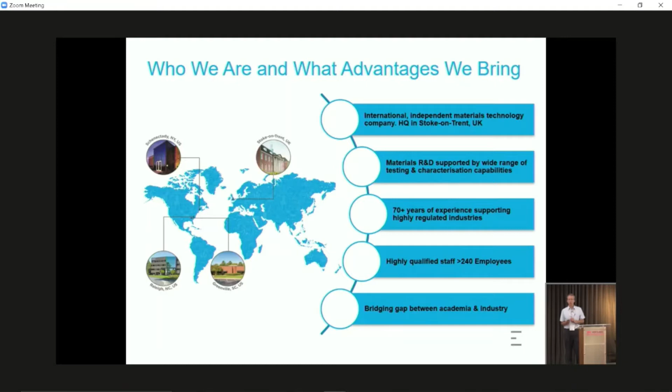So what we actually bring, where do we sit? We're actually sitting in a sort of triangle between research and development, materials consulting, and specialised testing. And the more of those things that can interact, the better as far as we're concerned.

On the research and development side, we're looking particularly, myself, at advanced ceramics - that's one of my areas of expertise. We're working in accelerated materials discovery, so this is new materials for new applications, and we've got some platform technologies around that.

Beyond that, into wider materials, we're looking at materials optioneering. We're looking at process support, particularly around additive manufacturing. We're looking at failures of systems and understanding those, very much around harsh environments and how materials are used in those.

There's certainly a big change in materials needs for aerospace at the moment, both with fuel issues - so carbon reduction, making the aerospace industry more fuel efficient. How can things be operated at lighter weight, higher temperatures, how things can go faster. All of these put challenges onto the materials that are fundamentally in there.

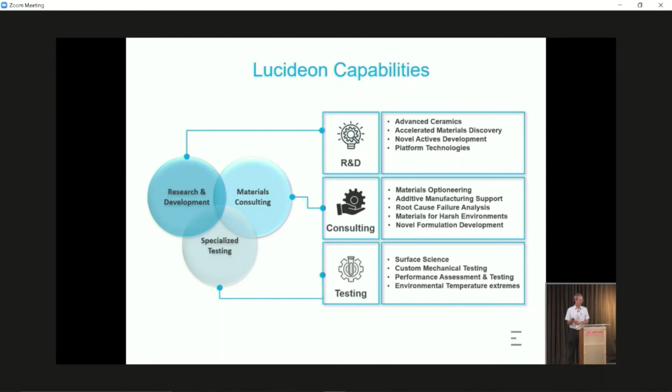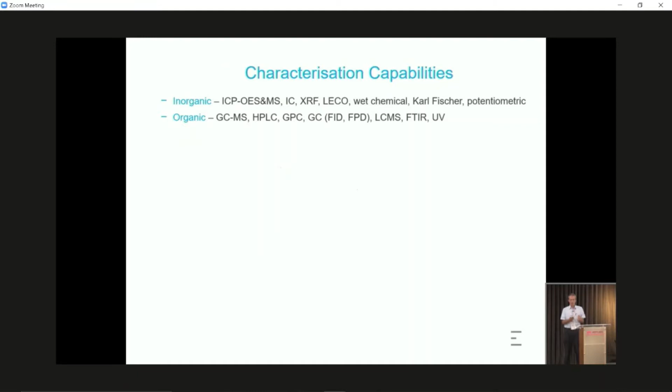So what we've got characterization-wise, we do a lot of taking things right back to the beginning. We're actually looking at the chemical composition - what are the building blocks in those materials? Can we measure it, what's there, is it compliant, what's the variation, etc. So lots of capability from ceramics, metals, and polymers within there.

You've then got to combine those - how do you put those different chemical entities together? So we're looking at the microstructure, what crystallographic, what physical structures are we making, how are those then actually pulled together, how are those made into structures? We'll be looking at microstructures, what's the grain size, what's the porosity, how do those bond together. Looking at fractography, looking at failures, how have they failed, and what's gone wrong, what can we learn from those.

On the surface side, we're looking at, as I said, very near surface, so the outermost layers of atoms and molecules. So if we think we've actually gone and cleaned something, we certainly haven't cleaned it - there is always residues on those. Understanding what those are and where they're from can be really quite important and enlightening. Similarly, also topography - a lot of things are actually topographic, even though they may appear to be contamination or discoloration.

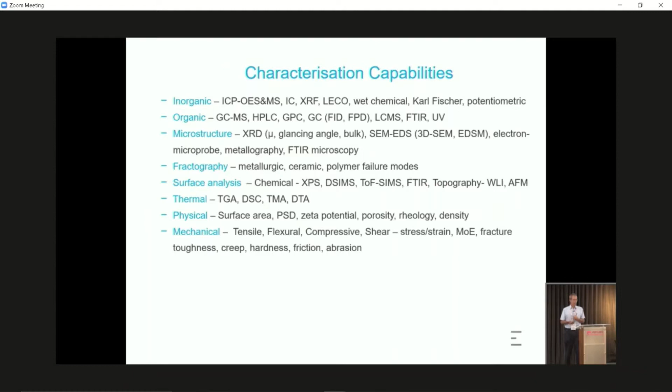Then going into some of the other things, a lot of capability around mechanical testing, so flexural, stress strain, etc., but also looking at the actual feedstock materials into those - what do they actually look like, do they have the right properties, performance. So quite a wide range of capabilities.

And then going on to environmental exposure, how can we challenge those materials into environments that we're actually going to be seeing? What can we do temperature-wise, what can we do age-wise, and what can we do thermal exposure-wise? And then obviously corrosion is an area, and one particularly unique capability is stress corrosion cracking, where we're actually looking at long-term crack growth within systems.

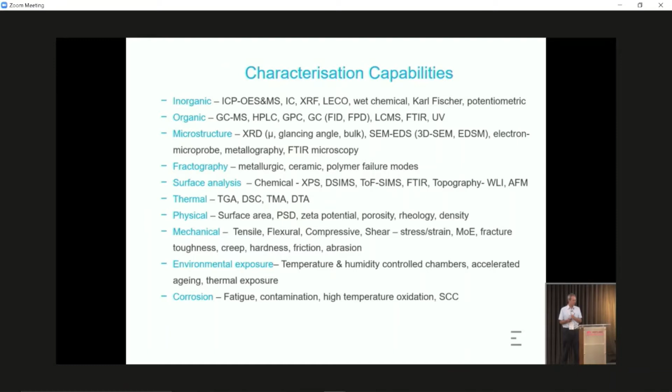So when we actually come back to testing programs, there's a lot of unpicking that's quite often needed. Fundamentally, to me, it always comes back to what the aim of what we're trying to achieve is - whether it's evaluating a material or evaluating a component.

So it's kind of the why. What conditions are we looking at? Are we looking at doing it just on the bench at ambient, or are we actually looking at trying to replicate some sort of environmental conditions that it might be expected to see?

Are there defined test criteria? What's actually needed within those requirements? Sometimes that's very clearly defined, other times it's much harder to do so. What are the materials themselves? Again, this has a big impact on how we'd actually go about evaluating it.

Big move in composites - where you'd have had traditional polymeric-based composites, now you've got ceramic matrix composites. How you test and evaluate those is very, very different. And sometimes you'll be working standard methodologies with the changes within materials, conditions, requirements, and particularly if we're stretching where those environments might be, there might not be appropriate standard test methods.

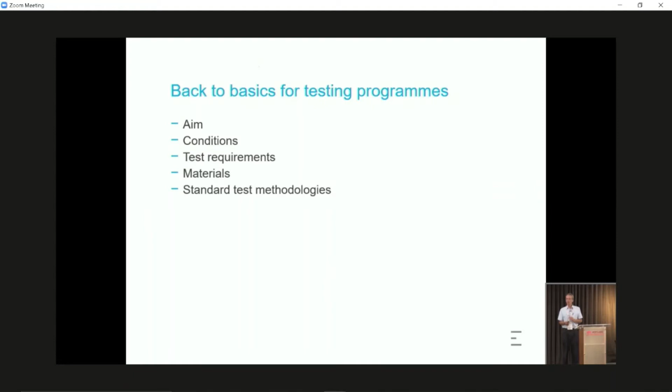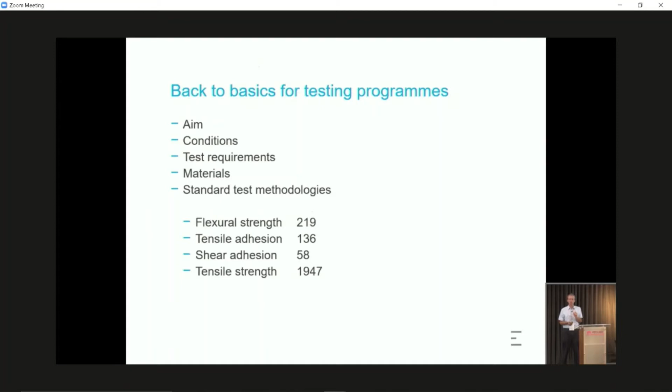So if we pull out that flexural strength measurement, again, some of those are within, and then we narrow it down to some of the material types that we might be interested in. I've just looked purely at some of the non-metallics, and very quickly those numbers collapse down into far fewer test methods. But again, are they appropriate for what we're trying to do?

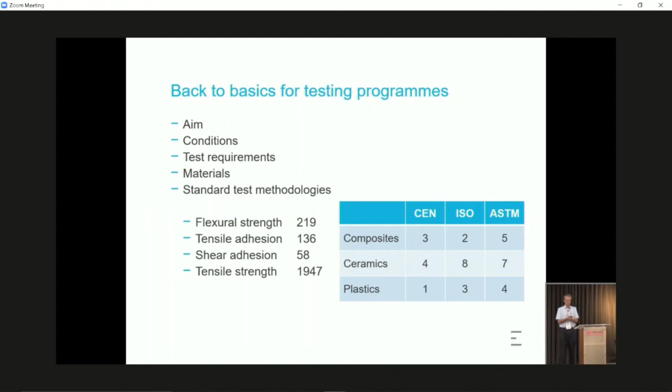So within the test programs, there's always a lot of complexity, and certainly with materials, we're looking at making things lighter, making things operate at higher temperatures. What other material options are out there? How can we push that boundary forward? And within that, there's never going to be a straightforward way of testing it.

So there's a lot of complexity - what material, how are we going to do it. Timeframes - we might have considerable constraints around timeframes of what we've got to do, and sparsity of material. If we're in a material development stage, we've almost certainly got much less material to work with than we would like to.

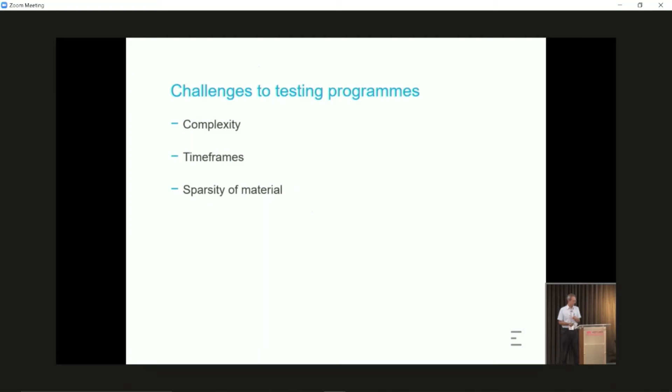Test parameters don't always work with the material that we're looking at. So yes, we might have a target of what we're trying to do, but actually, because of some constraint, we might not actually be able to get there. Test methods may be there, they may not - we might have to modify those in some ways. And clearly within that, there'll be a lot of conflicting priorities.

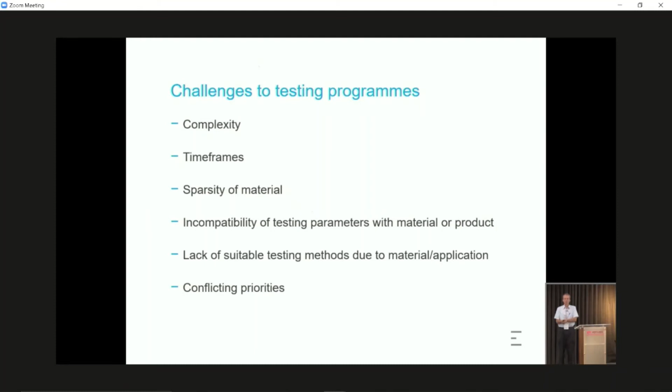So depending on how much material, you might have to do things sequentially. However, if timeframes are more important, then things like that fall by the wayside. So really, it's how do we map that out? Back to the purpose - what are the must-haves? What have we really got to get from what we're trying to do? We might have some peripheral nice-to-haves around that, but key within that is that sort of drop-dead, we must have this. Understanding what's available material-wise, and what we've got to do to prepare and make those materials into specimens.

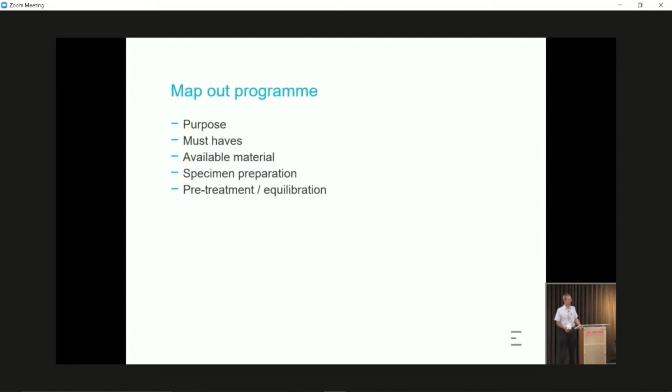How we're going to pre-treat, how we're going to equilibrate that. And then we've got a sequence of testing - we may be able to do some observational things first. We might have to pick the right test protocols, test methods. We might have to develop methods specifically for that particular application, and how many tests are actually valid for what we're trying to do.

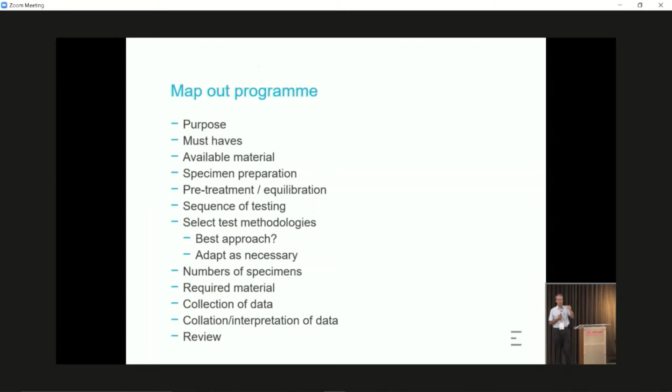We could then go through, we get the required material, we collect the data, we collate that and pull that together, and all the way through we have to review it. So really we're trying to put together that program and then really unpick that - have we covered all those bases within there that we need to? So finally, let's agree and finalize that work plan, so all perfect, everything going forward.

Okay, so now we actually start doing it. And this is where things invariably never quite go according to plan. So initially, have we got all the documentation in place? Have we got those pieces of paper? Do we have traceability of material? We undertook a piece of work a couple of years back, and the tracking of those actual parts before they got to us - there were problems with that, which to a large extent then invalidates a lot of the work that you've done. So it's really trying to make sure everything's done to make certain that we're going in the right place.

We got the material. Is it actually as we thought it was going to be, or is there something fundamentally different? Is it thicker? Is it thinner? Does it have holes in? There's quite often something that you never quite saw or anticipated within that. So always having a little look and see.

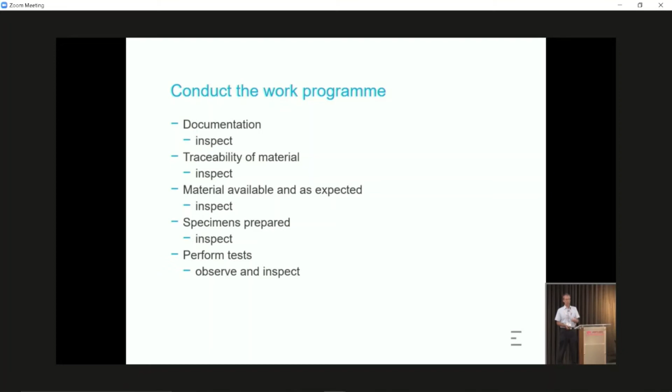Prepared the specimens again. Are they fit for purpose? Can we progress within that? We go through, we collect all the data that we need to, all the way through, keeping an eye on what do we see, what do we look at, what do we interpret from that, and similarly when we get data.

So, there's always something happens that shouldn't, or something unexpected that happens. First question is, what are we going to do about it? Does it compromise what we've seen? Does it compromise the data or the methodology? Does it invalidate what we're actually conducting? Or have we seen something that we didn't anticipate or expect? So essentially that's where we would get to.

There's really three scenarios around that. We either carry on, we go over the trenches and just battle on going forward. We react and learn and probe around that. What's that telling us about what we're looking at? What else can we find from that? Or actually, do we have to stop,

stand back and regroup and replan. And quite often, particularly with materials that are novel or in applications that are, we do come across those sorts of scenarios. And then whatever we do, we've got to agree how we're going forward with ultimately whoever's paying the bill at the end of the day. And clearly keeping that onward flow is absolutely key.

So I'm going to pull through a number of different examples of things. Some of them are around in ceramics, some of them are not. Clearly, as I say, my expertise is within the ceramic area.

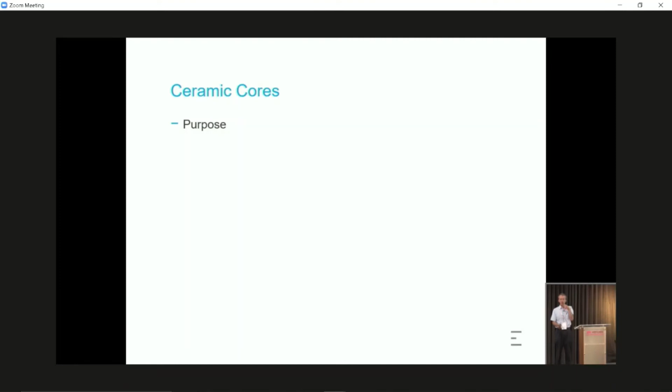One of the things that we actually work with is ceramic cores. Ceramic cores are a sacrificial ceramic part that gets cast within a turbine blade. If you make a turbine blade, what you would generally do is have cooling channels within these. So you would actually cast a ceramic component that goes in that is sacrificial. The key thing for that is its shape. So it's got to have a uniform shape, and it's got to expand uniformly.

So it's got to expand. You can't have it stretch in one direction or twisting or warping. And it's got to be readily removed at the end of the day. So they're the sorts of things that you're trying to do with it. It's how do we actually accomplish some of those.

So we'll pick one of those out: thermal expansion, how much it grows and shrinks. Now, we could make a bespoke test specimen with all the parts, but it's actually a different shape, formed differently. Is it actually a true representation of what's being made? Maybe there's time constraints, but that part has been specially designed with mineralogy that controls some of that thermal expansion. So rather than measuring that directly, we might want to step back and measure an analogy of it, trying to keep that going through.

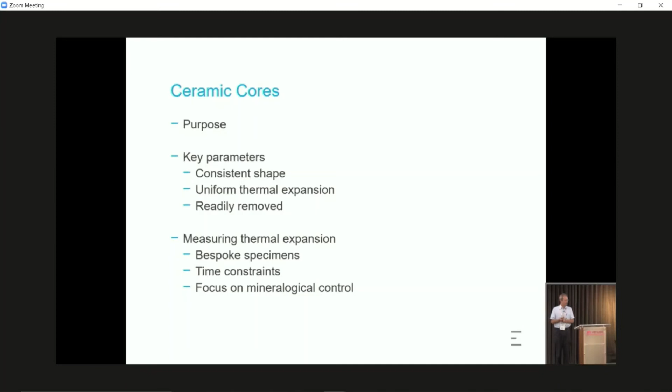This is a ceramic matrix composite development that we've been working on. This is quite a thin walled structure, in this case probably about 2 millimeters thick, and capable of high temperatures, in the sort of 800 to 1200 degrees range. So not massively high, but not massively low.

What we were looking at here is some indicative data. We haven't got much parts, so what data do we actually collect? Clearly the structure of the component is very important. We want to understand how those fibers are put together, how they're meshed together, how they're bonded. So we've got to collect that sort of data.

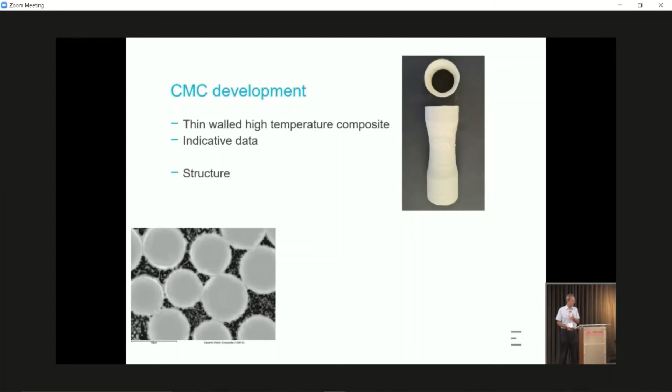We want to look at the thermal performance of it. What happens when you heat this up? What you can see there is a whole sequence of different trials of modifications to the actual material itself, and you can see how we've changed a couple of the parameters. We can dramatically change its dimensional stability, its shrinkage, etc. So clearly within that, we've got sweet spots that we're actually working towards. These are the sort of steps that we're getting through to try and get to where we want.

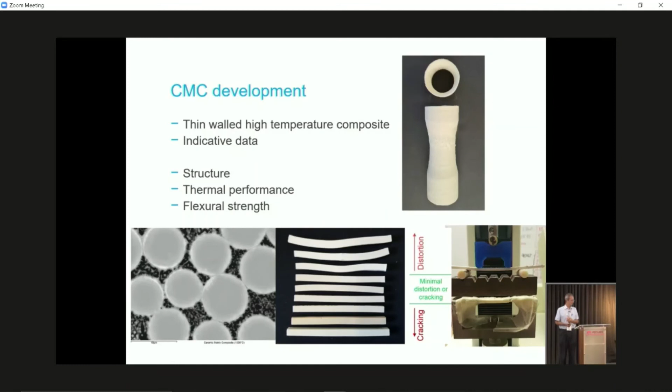And then we need to measure some mechanical properties. So in this case, we're doing some flexural strength measurements, and again here we're looking at deformation, deflection of it. How far that will go is quite key.

So another piece of work where we're actually looking at some interfaces in a very novel application. What we're trying to do is look at a whole sequence of different options, and we want to make them fail fast. We want to get rid of things that are of no use to us with minimal effort.

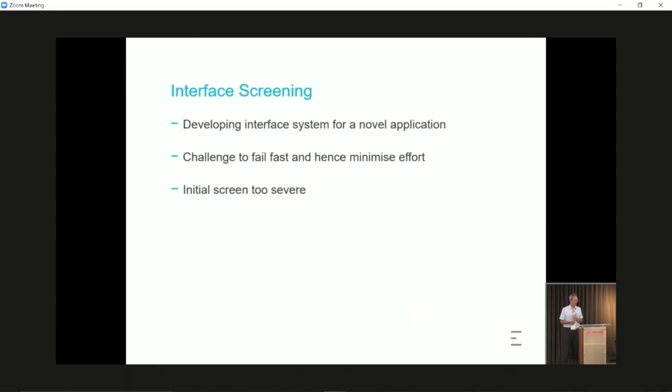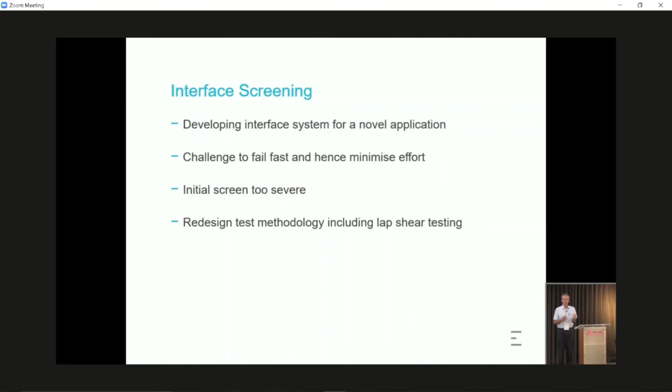So we challenge it as severely as we possibly can early on. Unfortunately, in this case, we went too far and everything actually failed. So we've got to roll back from that, we've got to replan, in that our scenario was somewhat extreme. So we redesign the test methodologies. Because we're looking at interfaces, we redesigned the way we're doing some of these lap shear type measurements, to try and get much better data than we would have done otherwise.

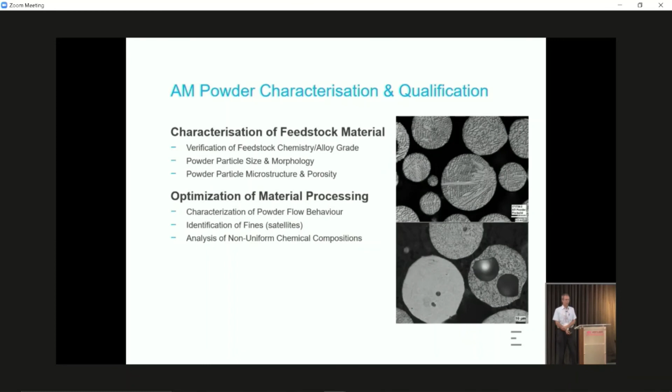Another area that we do a lot of, particularly my colleagues who are US based, is around AM processes and material characterization. In essence, a lot of things come back down to the feedstock materials, understanding what they are, and seeing what we come across within those. So we're looking at the feedstock materials and those processes, and at each stage evaluating, unpicking it, seeing what's in there to learn, and then recycling the material.

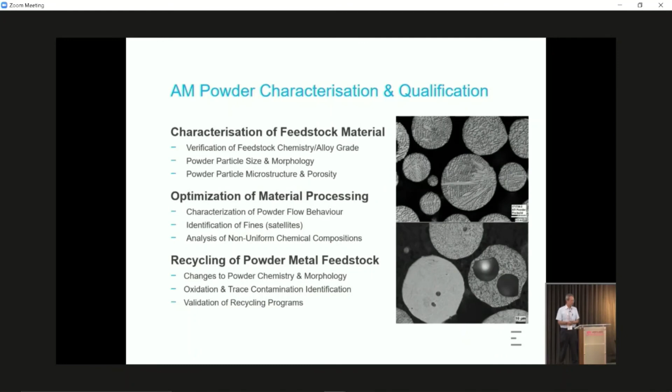So the vast majority of material in 3D print is not used in the final part and goes back through that process. It's how we actually recycle that, how we look at it, how we evaluate it, and how we validate that. So, as I say, it all comes back to powders. So again, what can we learn from it?

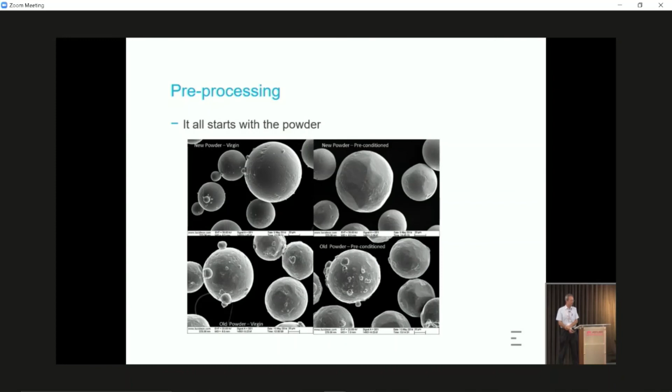You can see there's quite a difference between the virgin powders and how they've been once they've been through that powder bed. And it's not just the outside of the material, you've got the inside, so you've got internal porosities within those, you've got shape structures, little surfaces, some partially melted, remelted, with stuff melted onto the outside. So a lot of variability, and we need to understand those.

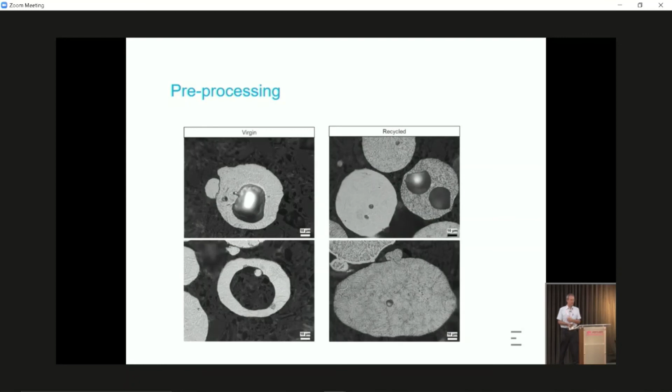Not all little satellites are satellites of what you'd expect. So in this case, we've got a titanium-based powder, and we've got contamination. On the face of it, they just look like little satellites, small particles. But when we start looking at the chemistry, we actually find that they are chemically very, very different. And in this case, we've got some fairly gross copper contamination.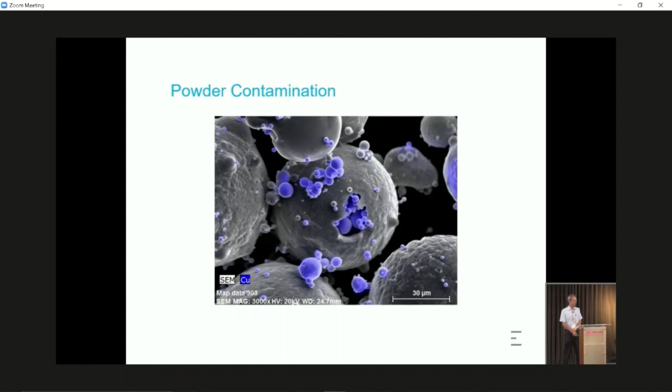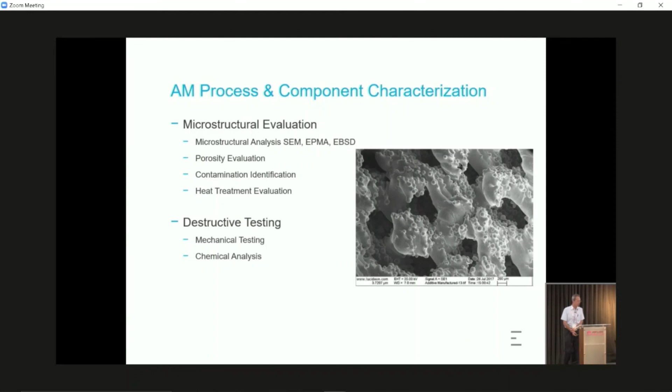When we're making structures that are variable internally, we've got porosity in there, we end up with a lot of surface topography. You can see a lot of metallic particles are semi-molten into that surface, and they do have a habit of shedding and falling off within that. We've got to understand all that system. We've got to go through those destructive testing programs to see what's actually happening, and if need be, non-destructive testing, to see how they look internally.

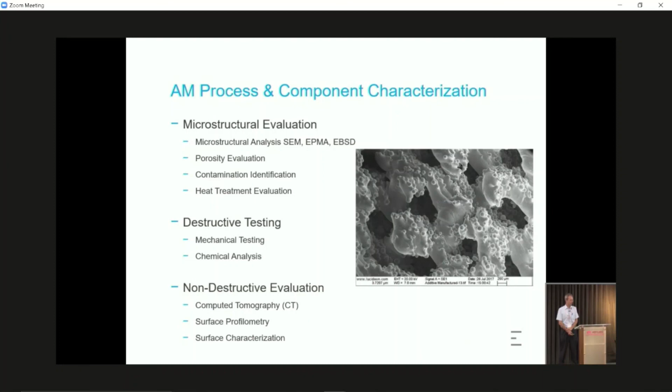This is as-fabricated AM, and what we've got is a titanium-based alloy. You can see the little bead structure, but if we look in detail at some of those chemistries, what we're actually picking out there is a very thin film of aluminium between those two particles. So what we've got is a necked area that is a relatively weak material with a relatively low melting point, and okay, that bead as it stands probably is completely irrelevant, but if that's endemic right through that system, we've got to really know about it.

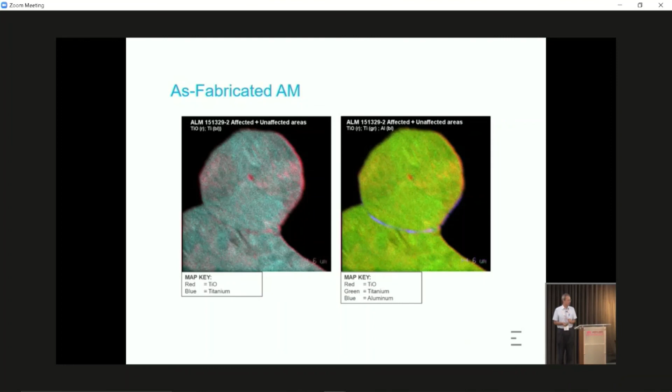So very often we have to look in some considerable depth to really see what's going on. So really coming back to the learnings, we need to focus on what the purpose is and what's important. What do we really have to get from this? We need to consider all the planning to make sure we've got a logical sequence, and we've got to be very prepared to amend, curtail, and redefine that program as we go.

Again, really coming back to what is the data for, what do we need to get out from it, and all the time we have to collect that information, observe it, and learn what we can as we go from that material. So thank you for that, and if there are any questions.

Over there. Are you actually making those materials, or are you outsourcing them?

In that particular case, that is an oxide-based system that we are developing and making ourselves, and it's a route with a low temperature formation process. So rather than it being a high temperature formation, we're actually looking at a low temperature process to get to a temperature stable material.